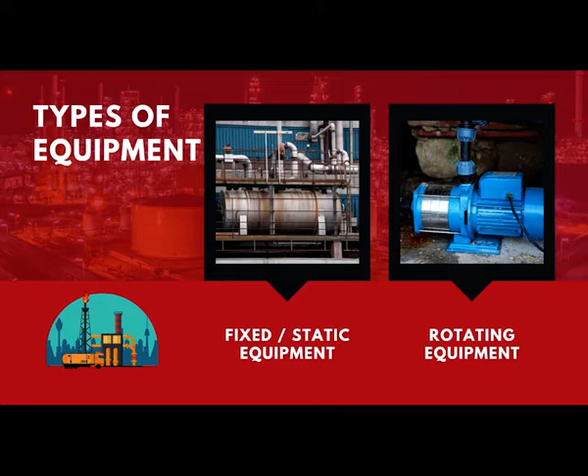First, let's try to understand the different kinds of equipment used in the petroleum refining industry, starting with the pump. Pump is the most commonly used item in the petroleum refinery. The purpose of a pump is to move fluids such as liquids and slurries from one place to another. It is normally used to pump liquid from a column to another column or to the storage tank. A pump displaces a volume by physical or mechanical action.

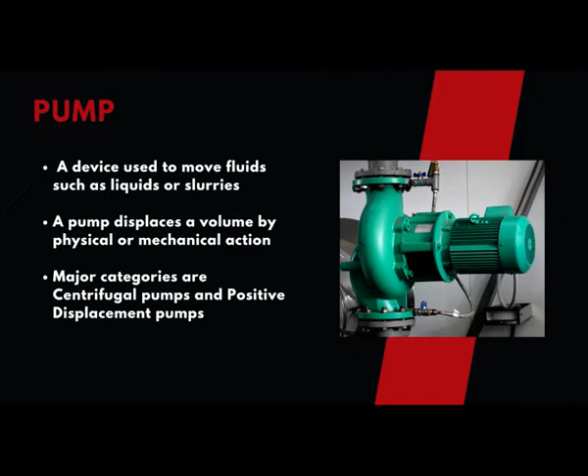Generally, almost 90% of pumps are driven by electrical motors, but there are cases where pumps are also driven by turbines. The major categories under pumps are centrifugal pumps and positive displacement pumps. We are not getting into the details of the classification of pumps, but we have to understand that pumps play a crucial role in every section of a refinery.

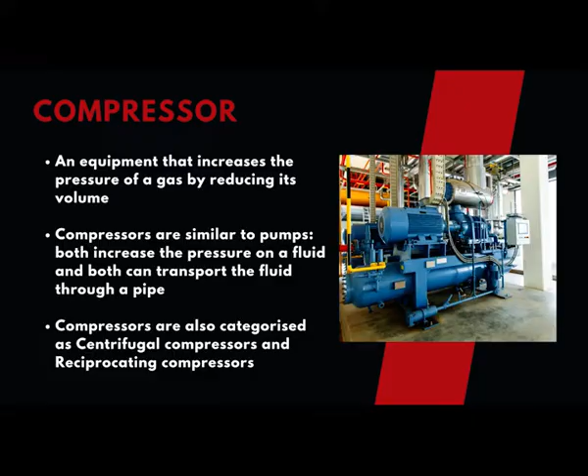A compressor is an equipment that increases the pressure of a gas by reducing its volume. This is also a classic example of a rotating equipment. Compressors are similar to pumps—both increase the pressure of the fluid and both can transport it through a pipe. But generally, pumps are meant for transporting liquids, whereas compressors are meant for moving gas or vapor. Compressors, like pumps, are also categorized as centrifugal compressors and reciprocating compressors.

Compressors generally have a lot of moving parts, and hence they are provided with adequate safety mechanisms like vibration monitoring, etc., to safeguard their safe operation.

Then, motors. An electric motor uses electrical energy to produce mechanical energy, typically through the interaction of magnetic fields and current carrying conductors. A motor is one of the prime movers of any rotating equipment like a pump or compressor. There are several classifications under motors, like induction motor, series motor, squirrel cage motor, etc., but we will not get into those details today. We have to remember that motors are one of the prime movers of any rotating equipment like pumps and compressors.

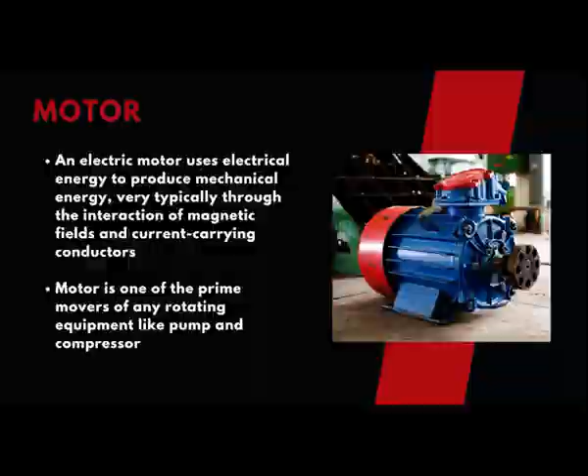Then comes the turbine. A turbine is a rotary engine that extracts energy from a fluid flow and converts it into useful work. I think all of us would have studied about the hydraulic turbine fitted in a dam, where stored water is used to produce electricity by rotating the water turbine.

In a similar manner, here in the refinery, turbines are driven either using steam or high pressure hydrocarbon liquid. The simplest turbine has one moving part, a rotor assembly, which is a shaft or a drum with blades attached. Moving fluid acts on the blades, or the blades react to the flow, so that they move and impart rotational energy to the rotor.

Generally, in a refinery, turbines are part of the power and utilities department, and their main purpose is to generate power with the help of an alternator. But there are a few turbines available in the process plant to drive the pump, so that in case of power failure, the pump can still continue to be in operation.

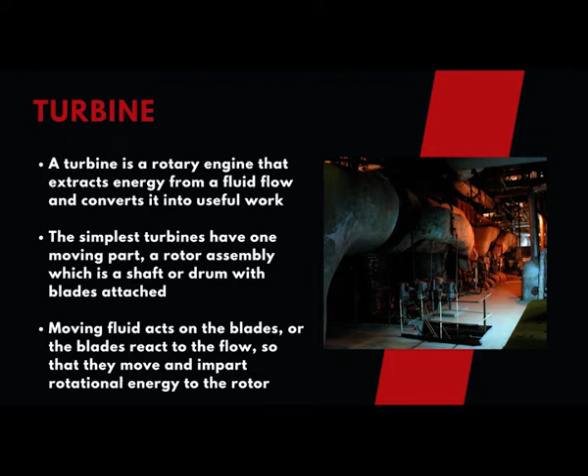In a refinery, you will be able to see different kinds of pipelines making crisscross flow. Their purpose is to transport oil or gas from one location to another, or from one system to another system.

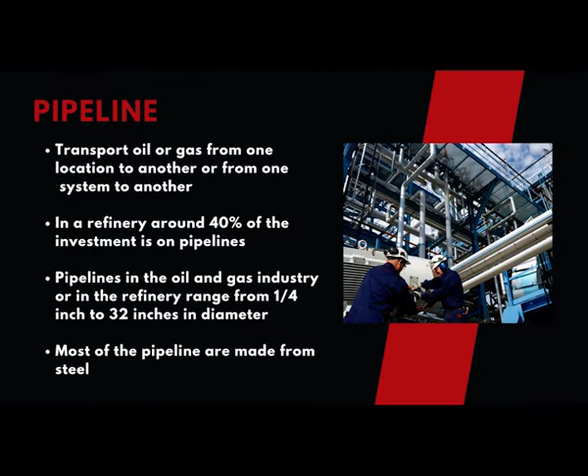In a refinery, almost 40% of the investment is on pipelines, apart from other equipment like pumps, compressors, and heat exchangers. A pipeline in the oil and gas industry can vary in size from a quarter inch to 32 inches. Most pipelines are made from steel, but in some places you can even find copper tubing. The important aspect about a pipeline is that its integrity always needs to be checked, otherwise it can leak and create a potential safety hazard. So whenever we think of a pipeline, we have to remember about pipeline integrity.

Then comes the heat exchanger. A heat exchanger is a classic example of static or fixed equipment, meaning there are no moving parts. It is primarily a shell kind of arrangement within which you have a bundle of tubes. It is a device built for efficient heat transfer from one medium to another.

For example, when you want to send crude oil to the furnace, you want to reduce the load of the furnace. To achieve that, we try to preheat the crude oil in a set of heat exchangers known as the preheat train. Where do they get heat from? They get heat from the different kinds of products generated from the refinery. So the products lose heat and are then cooled and taken to storage for safe storage and handling, while the crude oil picks up that heat so that before it goes to the furnace, it is already preheated, and the furnace load can be reduced. All this is possible because of the set of heat exchangers.

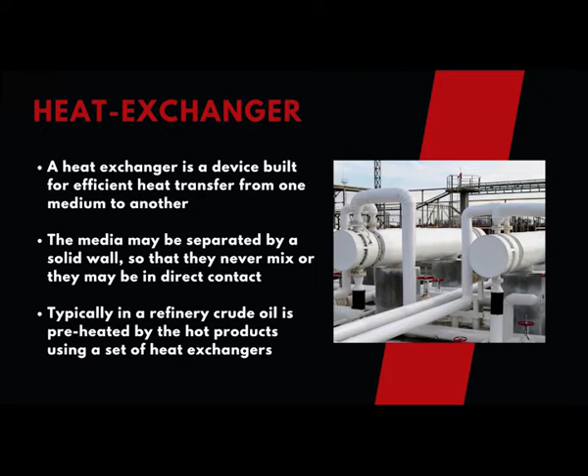Typically in a refinery, crude oil is preheated by the hot products using a set of heat exchangers. There are multiple varieties of heat exchangers in terms of how they are constructed or how the flow happens. A common example is the shell and tube heat exchanger, and based on the flow inside the shell as well as the tube bundle, there are multiple configurations available.

Another important equipment inside a refinery is the fired heater or furnace. A fired heater or furnace is a device for heating the crude oil, and it can also be called a fired heater used in boiler applications in refineries. Primarily, the furnace has burners which can take fuel oil or fuel gas as the source of fire. The heat from the burners is transferred through convection and radiation to the process fluid, either crude oil or any other product, and finally the required temperature is achieved.

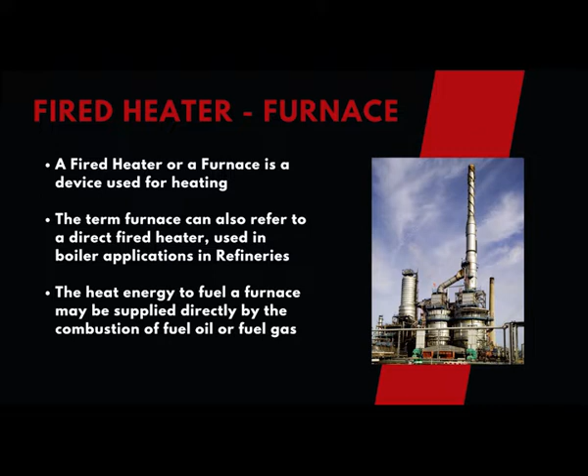In the crude distillation unit's atmospheric furnace, the temperature of the crude oil is heated up to 350 to 370 degrees centigrade, depending on the type of crude oil. The furnace has burners, a stack, chimney, and refractory lining. Periodical inspection of the furnace is important for an uninterrupted operation of the fired heater or furnace.

Then we come to the distillation column, the most important equipment inside a refinery. Every refinery needs at least one distillation column. If the crude is sweet and very light, one column is sufficient to produce different kinds of petroleum products from the crude oil, and that kind of refinery is known as a topping refinery. But most refineries across the globe are complex refineries, which have multiple distillation columns.

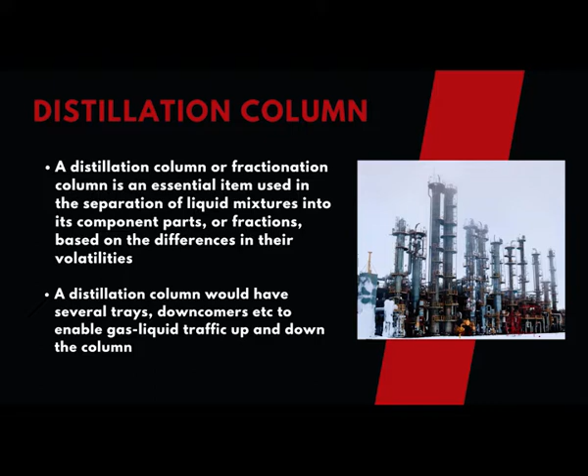In the crude distillation unit, we'll have one distillation column as the atmospheric distillation column, then a vacuum distillation column, then an LPG stabilizer. For the FCC unit, we'll have a main column. There are multiple distillation columns available. It is primarily a fractionating column, essentially used for separating liquid mixtures into their component parts or fractions based on differences in boiling points or volatilities. A distillation column would have several trays, downcomers, etc., so that vapor and liquid can travel up and down.

We move on to separators. A separator is just a large drum, most of the time a horizontal drum, designed to separate production fluids into their constituent components of oil, gas, and water. At different stages in a refinery, the oil, gas, and water need to be separated, and this is accomplished with the help of a separator.

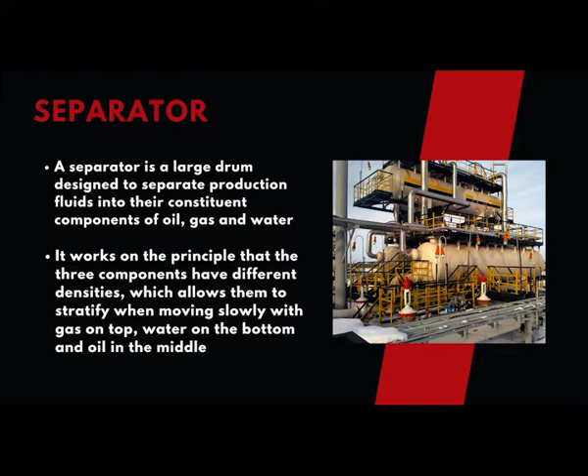The gas, being light, gathers on top of the separator and is taken out from the top exit. Water, being the heaviest among the hydrocarbon and water, settles down at the bottom of the separator and is continuously drained out. The liquid is then taken for further processing. It works on the principle that the three components have different densities which allow them to stratify when moving slowly, with gas on top, water on the bottom, and oil in the middle.

And based on the operating pressure, the separators are classified into high pressure separator, medium pressure separator, and low pressure separator. Then we have storage tanks.

We already discussed storage tanks in some of the previous modules, but we will cover something more in this module. A storage tank is a container usually for holding liquids. For liquid fuels, there are fixed roof tanks and floating roof tanks. Basically, these are the two major classifications, fixed roof and floating roof.

Fixed roof tanks are meant for liquids with very high flash points, that is fuel oil, water, bitumen, etc., which will have less volatility. While floating roof tanks are used for liquids with low flash points, example, naphtha, aviation turbine fuel, motor spirit, ethanol, etc.

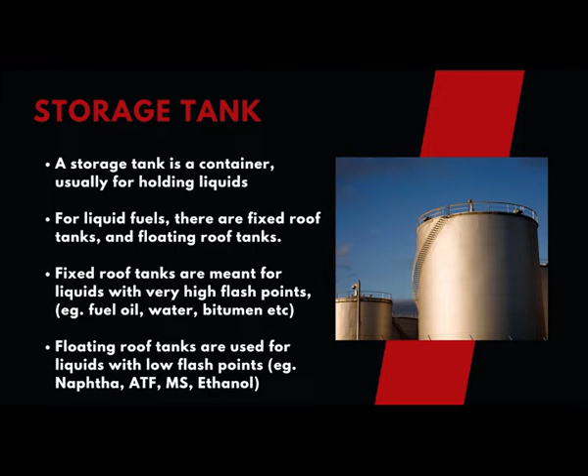Then we have the pressurized storage tanks, which are meant for storing certain hydrocarbons that are liquid under pressure. For example, LPG, butylene, propylene. The pressurized storage tanks can be classified into two categories: one, bullet, and the second one, spheres.

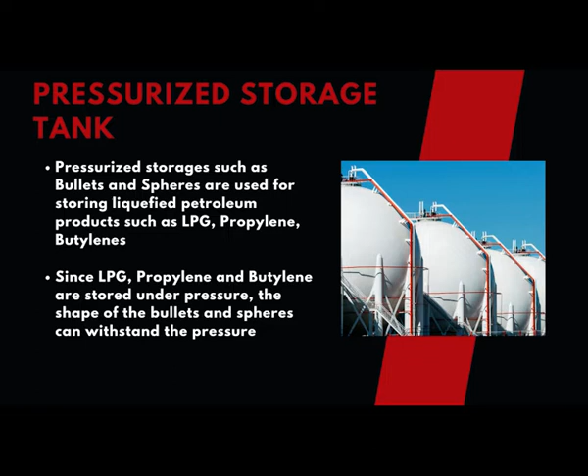Since LPG, propylene and butylene are stored under pressure, the shape of the bullet and the spheres can withstand the pressure. If it is not having a symmetrical dimension, then the pressure will be different in different places inside the vessel. That is why a cylindrical storage known as a bullet or a sphere is used for storing liquids that are under pressure.

Then we have reactors, which are again an essential part of a refinery. Many times the crude oil or the hydrocarbon fractions may have to undergo a lot of chemical reactions. These chemical reactions are possible inside a reactor. Most of the time, the catalyst inside the reactor is available in the form of a fixed bed.

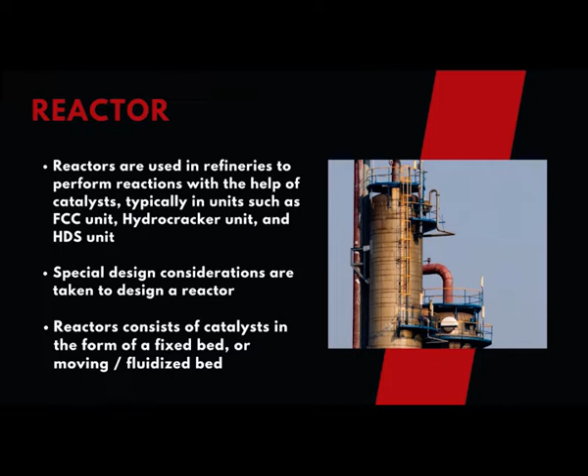Special design considerations are taken to design a reactor. A reactor consists of a catalyst in the form of a fixed bed, or a moving or fluidized bed.

Cylinder filling carousel - this is the tail end of the refinery. Once the LPG is stored in the storage facility, from there the LPG is taken to the cylinder filling carousel, using which we fill the LPG into cylinders that can be used as domestic LPG.

A filling carousel is intended for filling LPG in large groups. It consists of a frame with running wheels, rails, a central column for LPG and air, and a driving unit, the carousel frame around the central column.

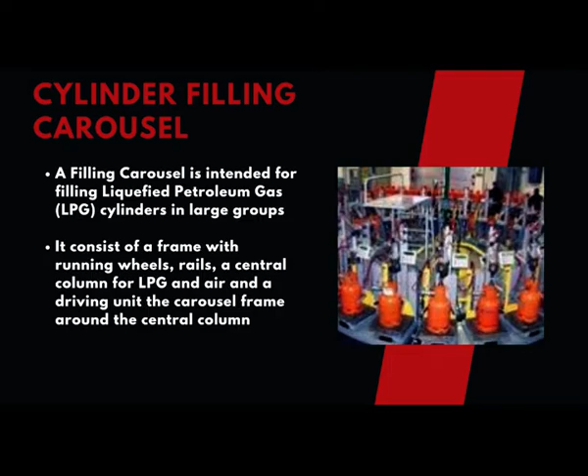Even in our domestic walk of life, when we have so many appliances, they are bound to need repair. If we don't get them repaired, then we are put into hardship, or sometimes some of our activities come to a standstill. So, imagine the plight of equipment repair in a refinery.

If a pump fails and it is not attended to immediately, it is going to tell upon the performance of the refinery. So obviously, all the equipment must be properly maintained in a proactive fashion, or if something goes wrong, immediate action needs to be taken to restore it to normalcy. Otherwise, the refinery will be running and producing petroleum products, but those products may not be meeting the specification of the market.

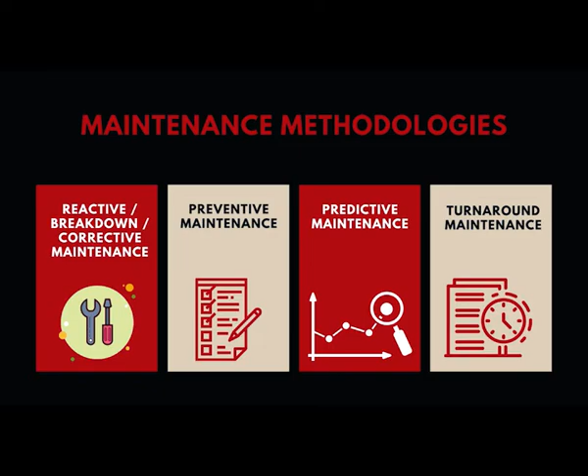These maintenance methodologies are broadly classified into: number one, breakdown maintenance, also known as reactive or corrective maintenance; the second category is preventive maintenance; third is predictive maintenance; and finally, the fourth is turnaround maintenance.

Breakdown maintenance is the maintenance required when an item has failed or worn out, to bring it back to working order. Breakdown maintenance is also known as reactive or corrective maintenance, and it is the most commonly used approach inside a refinery.

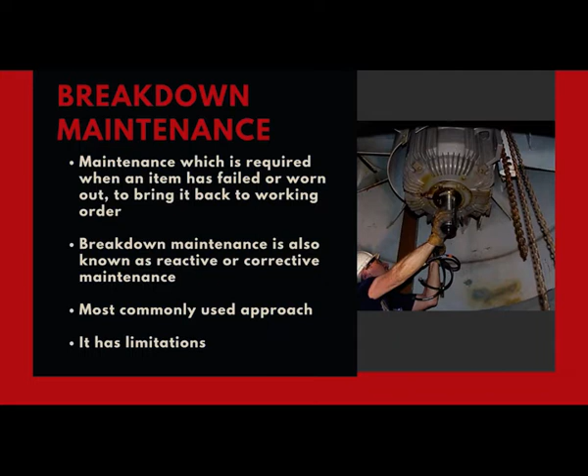This is almost similar to what we do at our house. When one of our home appliances fails, we take it to the shop and get it repaired. In the same manner, certain equipment will be taken care of with the help of the breakdown maintenance strategy. It is the most commonly used approach, but it has got a lot of limitations. So what are those limitations?

When an equipment fails, it often leads to downtime in production, and sometimes it causes damage spreading to other parts in the refinery. In most cases, this is a costly maintenance approach. Also, if the equipment needs to be replaced, the cost of replacing it alone can be substantial.

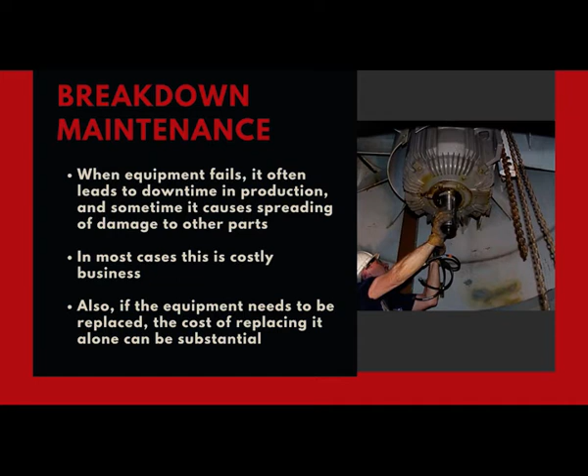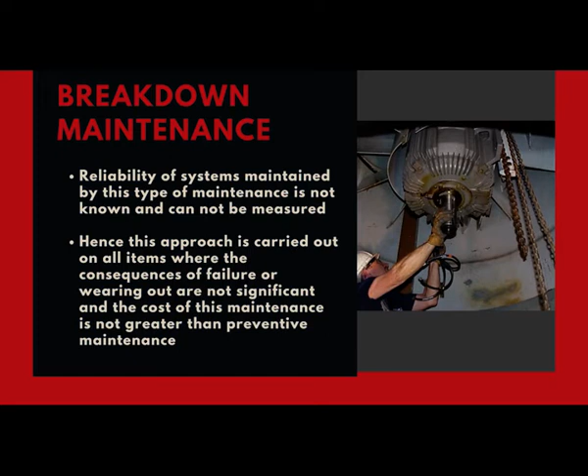Breakdown maintenance is the first and foremost type of maintenance strategy. In this breakdown maintenance, reliability of the systems maintained by this type is not known and it cannot be measured. Hence, this approach is carried out on all items where the consequences of failure or wearing out are not significant and the cost of maintenance is not greater than preventive maintenance.

The next one is preventive maintenance. Preventive maintenance is the care and servicing by personnel for the purpose of maintaining equipment and facilities in satisfactory operating condition by providing for systematic inspection, detection, and correction of incipient failures either before they occur or before they develop into major defects.

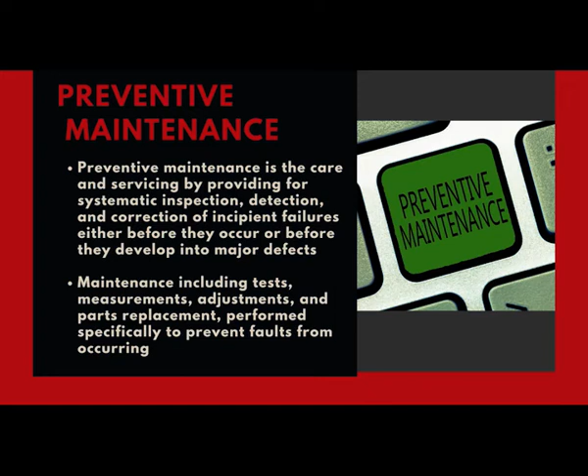Preventive maintenance includes testing, measurements, adjustments, and parts replacement performed specifically to prevent faults from occurring. So, preventive maintenance can be described as maintenance of equipment or system before a fault occurs.

For example, if a refinery has got 500 pumps or 500 rotating equipments, under preventive maintenance strategy, each day there will be a schedule, and each day 100 different types of pumps will be tested.

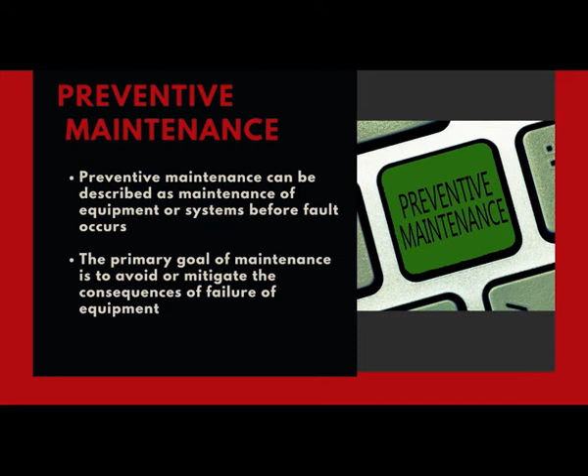The primary goal of this type of maintenance is to avoid or mitigate the consequences of failure of equipment. This may be by preventing the failure before it actually occurs, which planned maintenance and condition based monitoring help to achieve. Preventive maintenance can be further classified into two categories.

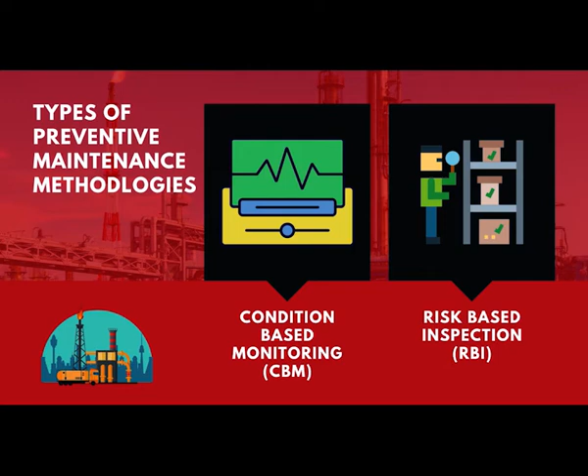One is condition based monitoring and the other is risk based inspection. Under condition based monitoring, generally the rotating equipments are subject to condition based monitoring. Here the technician will collect the vibration data of a pump at a specified interval, and based on the analysis of the vibration data, the prediction would happen as to whether the certain pumps can be repaired or overhauled. So based on that the decision would be taken.

Here in this condition based monitoring, in recent years there is extensive instrumentation being employed along with the tools for analyzing the condition data.

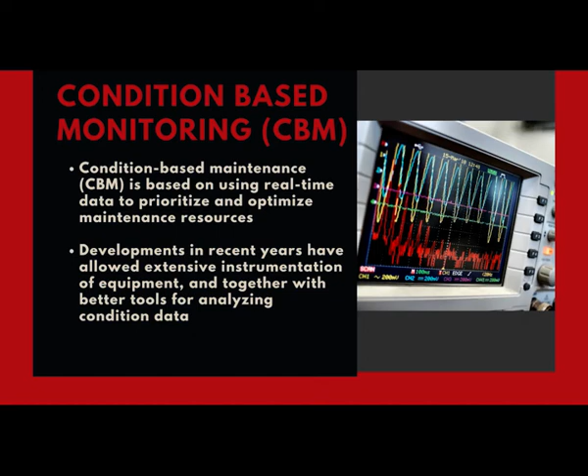Risk based inspection is primarily meant for very sensitive equipment like the reactors or the transfer line of a furnace. Using different gadgets and sophisticated equipment, the thickness of the particular location is monitored, and based on that, it will be predicted whether this equipment is going to fail or not.

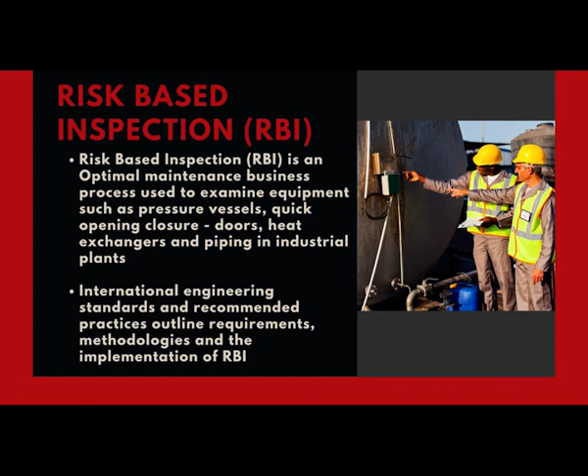Predictive maintenance is the next category or next development. Based on the past data and using a lot of data analytics tools, you will be able to predict whether this particular equipment is going to perform without any issues for the next 6 months.

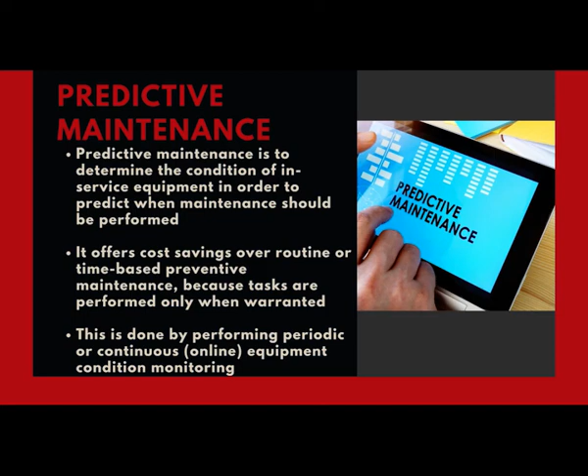And if at all a setback is identified, then accordingly the maintenance strategies are defined and then taken into action. So, that is known as predictive maintenance.

The last category of maintenance is turnaround maintenance. It is a planned periodic shutdown. Normally that happens every 3 years or 4 years depending on the size and throughput of the refinery. During turnaround maintenance, there are several activities that will happen.

For example, heat exchanger cleaning, distillation column tray cleaning, or any modifications or debottlenecking activities, which is to identify the limitation of the plant and then remove the limitation by putting additional facilities so that the throughput can be improved. Turnarounds allow for necessary maintenance and upkeep of operating units and are needed to maintain safe and efficient operation.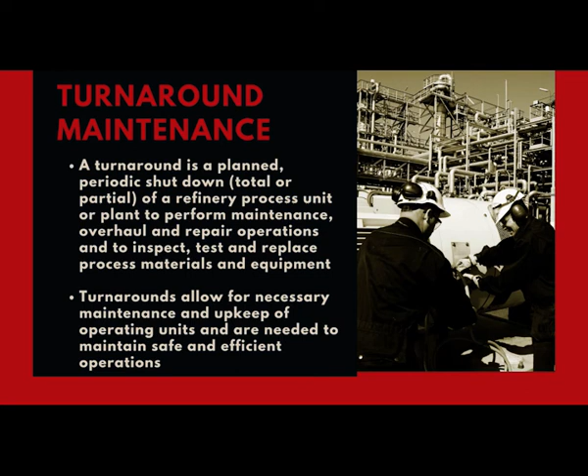Turnaround maintenance is scheduled at least 1 to 2 years in advance and does not necessarily focus on the same operating units. Depending on the process unit and the amount of maintenance needed, the length of the turnaround can vary from 1 week to 4 weeks or more.

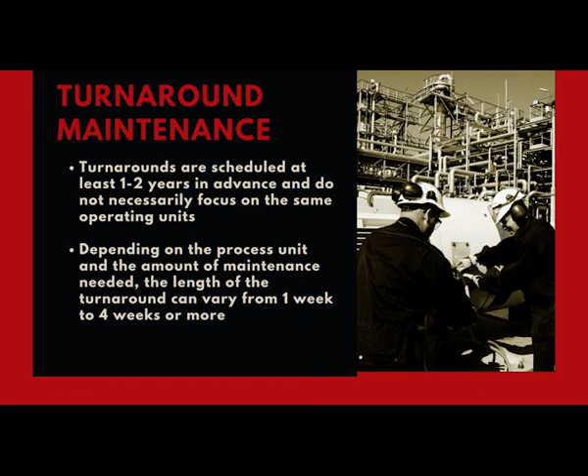There will be a lot of contract workers performing several activities during a turnaround maintenance. During turnaround maintenance, there is every likelihood for incidents to happen, including safety incidents. So, in order to avoid these safety incidents, safety is given the prime focus during turnaround maintenance.

In today's episode about equipment maintenance, we have learned that petroleum refineries are an asset intensive industry, and the equipment is categorized into static or fixed equipment and rotating equipment, and the various maintenance strategies employed are breakdown maintenance, preventive maintenance, predictive maintenance, and turnaround maintenance.